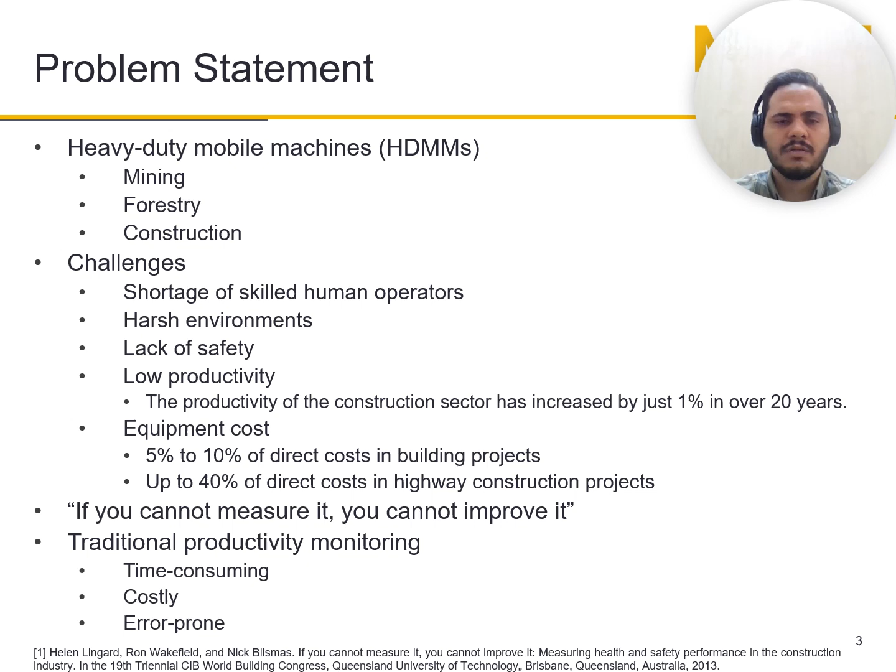The traditional methods for productivity monitoring are based on human and manual observation. They are time consuming, costly, and error prone. We need an automatic method for productivity monitoring.

It can help us reduce the operation time, fuel consumption, and cost. It can also help us optimize planning and working parameters to efficiently manage ongoing projects, as well as accurately cost and budget future projects. Also, it can help us identify potential project issues and improve management and economic situations.

Our application in this paper is the hydraulic excavator. This machine consists of three main parts: traveling body, swing body, and front digging manipulator. Two important tasks for the excavator are the digging and trenching operations.

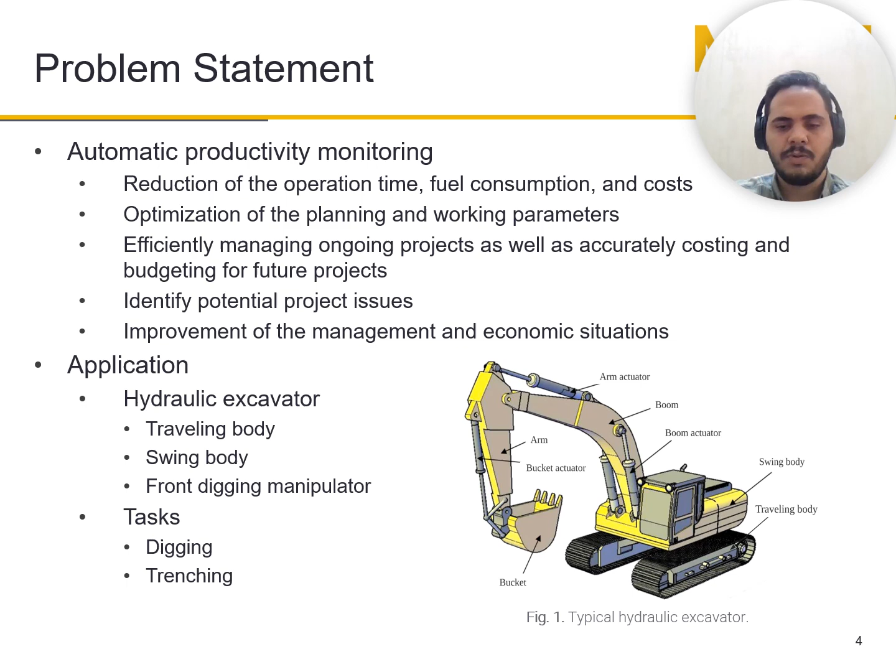Firstly, we should define the productivity. In the productivity of an excavator in digging and trenching operation, there are two important parameters: the quantity of material and the operation cycle time. The operation cycle time consists of the time for filling the bucket, swinging loaded, dumping material, and swinging empty.

The productivity definition for digging is the amount of material, the volume of material per time, and for the trenching operation it is the length of the trench per time.

There are different conditions that can significantly affect the productivity of an excavator in digging and trenching operations: size of the excavator, bucket capacity, repair and maintenance or condition of the machine, digging depth, and swing angle of the operation.

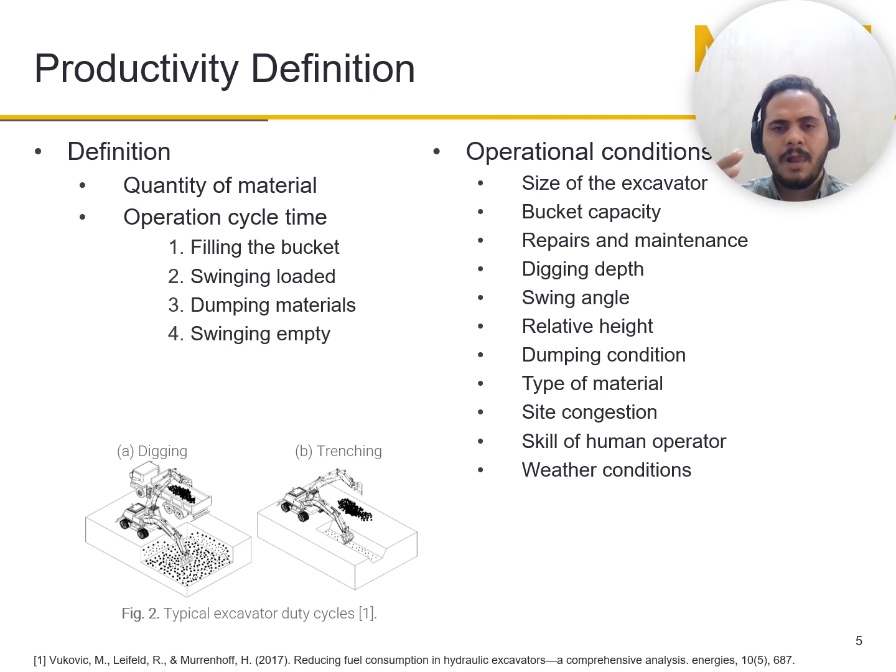Relative height, actually the height between the digging and dumping position. The dumping condition may be, sometimes it's a small truck or sometimes a big pile of material. Also the type of material - when the material gets hard, it takes more time to do the operation. Site congestion, skill of the human operator, and also weather conditions can affect the productivity of the machine.

We need to specify the production performance ratio of the machine. Actually, the closer this index is to one, the higher the machine performance. This index can help worksite managers compare machine productivity with the capability of the machine, ensuring the machine works at full capacity, meets the needs of the project, and provides a high return on investment.

We can calculate this index by using the actual productivity and theoretical productivity of the machine. In this paper, we focus on the theoretical productivity of the machine.

There are some ideas on how to calculate theoretical productivity. For example, from the construction equipment manufacturers' handbooks, we have a model from Caterpillar and Komatsu. But the model from Caterpillar cannot be used automatically because it needs a descriptive model involving a human. So we focus on the BML model from Germany and also the Komatsu model, and we develop them for use in an automatic manner.

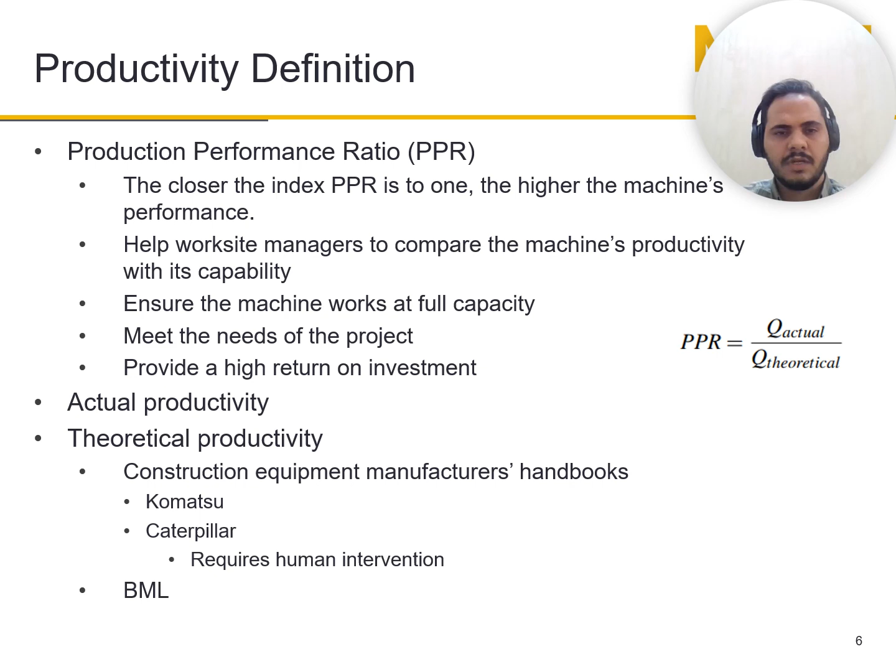Firstly, we need to define the BML model. Here you can see the formula for the BML model.

We have the heap bucket capacity. There are two different standards for the heap capacity: the SAE standard, Society of Automotive Engineers, and the CECE standard, Committee for European Construction Equipment. In the figure, you can see the difference between the two standards. The SAE standard is bigger than the CECE by around 10 to 20%.

Another parameter is the bucket fill factor, which we should specify based on the type of material. Another parameter is the theoretical cycle time. Also, we have two modifying parameters: swing angle factor and digging depth factor.

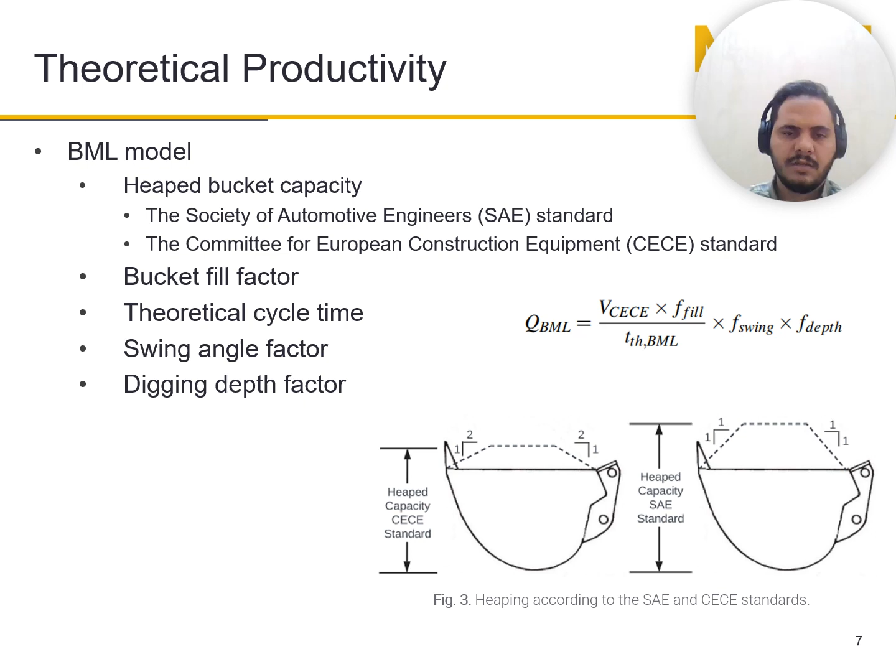Here you can see the formula for the bucket fill factor, theoretical cycle time, swing angle, and digging depth factor.

Firstly, we have a table. We have four different types of excavated material: high, medium, low, and very low. And we have a fill factor for each group of material.

Another step is the theoretical cycle time. We have two formulas: the first one is for high and medium, and the second one is for low and very low types of excavated material.

Also, we have a formula that calculates the swing angle factor based on the swing angle of the operation. And we have two formulas for the digging depth factor: the first one for high and medium, and the second one for low and very low types of material.

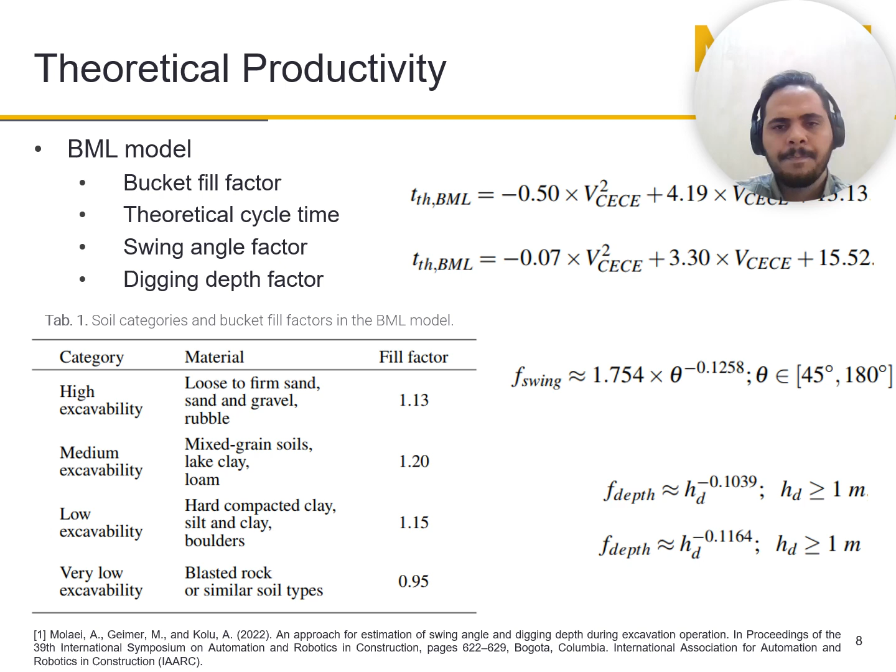Now we have the Komatsu model. In the Komatsu model, we use the heap bucket capacity based on the SAE standard. And for the bucket fill factor, we have a table showing different fill factors for different types of material.

When the material gets harder or bigger, the fill factor makes it smaller. And also we have a theoretical cycle. We should calculate the theoretical cycle and also the conversion factor.

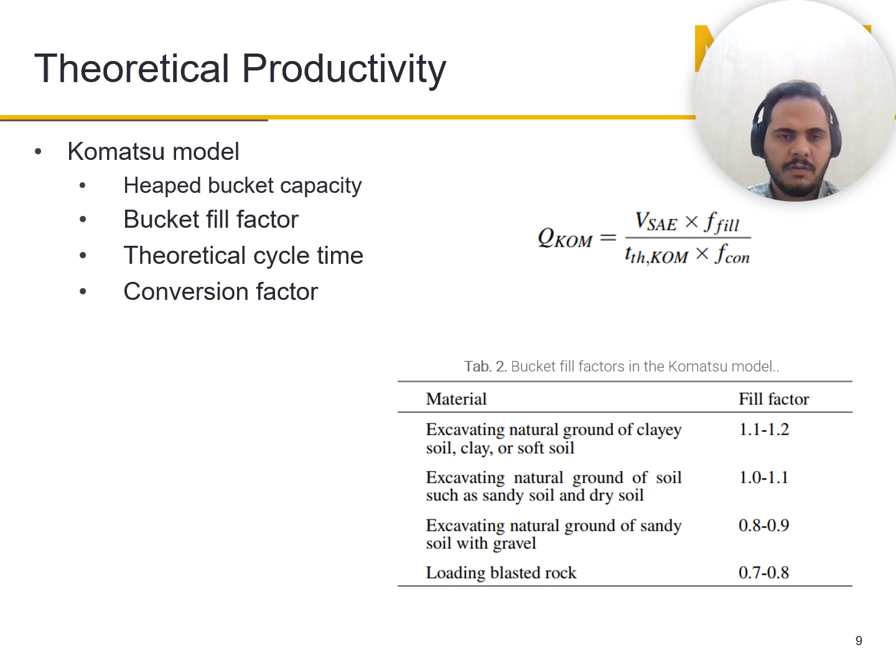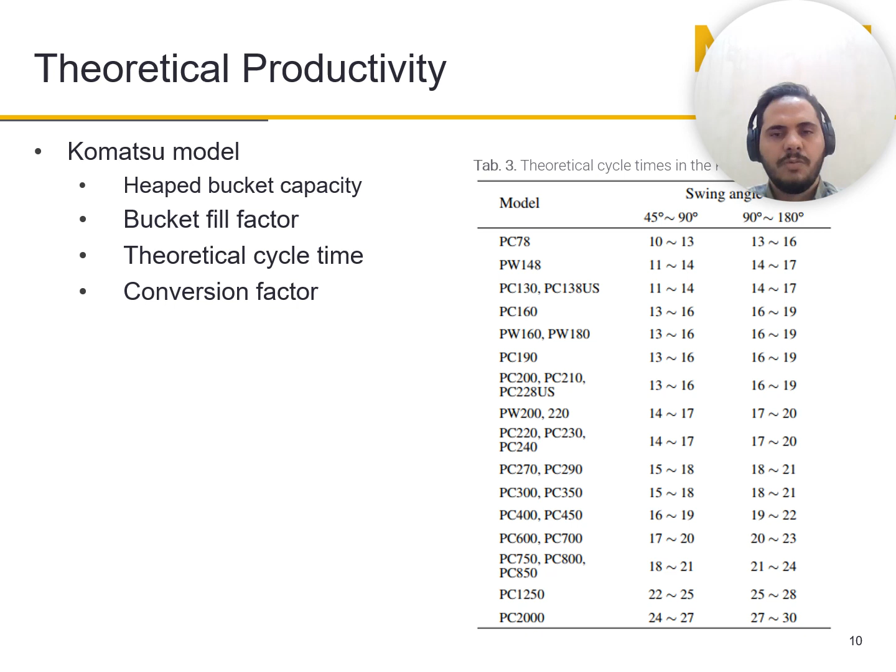In this table, you can calculate the theoretical cycle time based on the swing angle of the operation and also the capability, model, or size of the machine. When the machine is bigger, it takes more time to do the operation, so the theoretical cycle time is bigger.

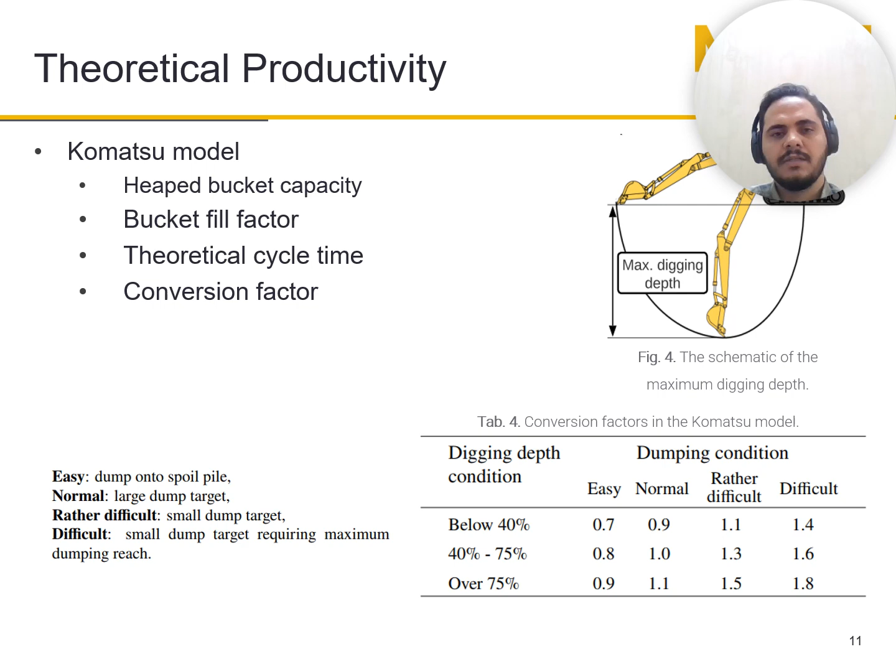For easy, it defines dumping onto a spoil pile. For normal, it is a large dump target. For rather difficult, it is a small dump target. And for difficult, a small dump target requiring maximum dumping reach. This is the definition of the conversion factor in this formula.

Now we extend the theoretical productivity for the trenching operation. The definition of productivity in the trenching operation is the length of the trench per time.

We get some help from the productivity definition for the digging operation. We are using that definition and, after some modification, try to calculate productivity for the trenching operation using two new parameters: the swell factor and the cross-sectional area of the trench.

In the first part, we need to change the definition of the volume of the material. In the digging operation, the definition is based on the loose volume, which is the volume of material piled in the stockpile or in the back of the dump truck in a loose condition.

But in the trenching operation, we should switch to the bank condition, the bank or unexcavated volume, the amount of soil already in the ground. By using the swell factor, as shown in the table for different types of material, we change this volume definition from the loose condition to the bank condition.

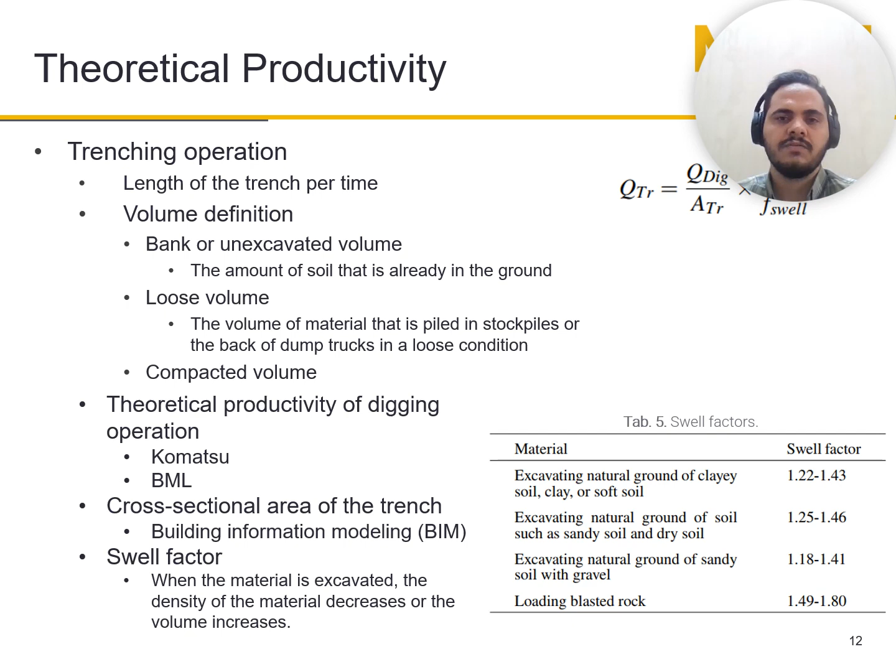By using the Komatsu and BML models, along with the cross-sectional trench area and the swell factor, we extended the definition for the trenching operation.

One important point to consider before analyzing the results is that for automatic calculation of total productivity in digging and trenching operations, we need some inputs: the swing angle of the operation, digging depth, and type of material.

In one of the references of this paper, we presented a method to automatically calculate the swing angle and digging depth of the operation. I mention this point to clarify that the type of material and dumping conditions are assumed as known inputs.

Firstly, we analyze the swing angle and the effect of digging depth on this formula. We perform the swing angle analysis, assuming the pile of material is on the ground surface, so depth is around zero. The swing angle changes from 45 to 180 degrees. As shown in the figure, the absolute difference between the BML and Komatsu models is less than 3.5 seconds, and the Komatsu model seems more sensitive to swing angle variation.

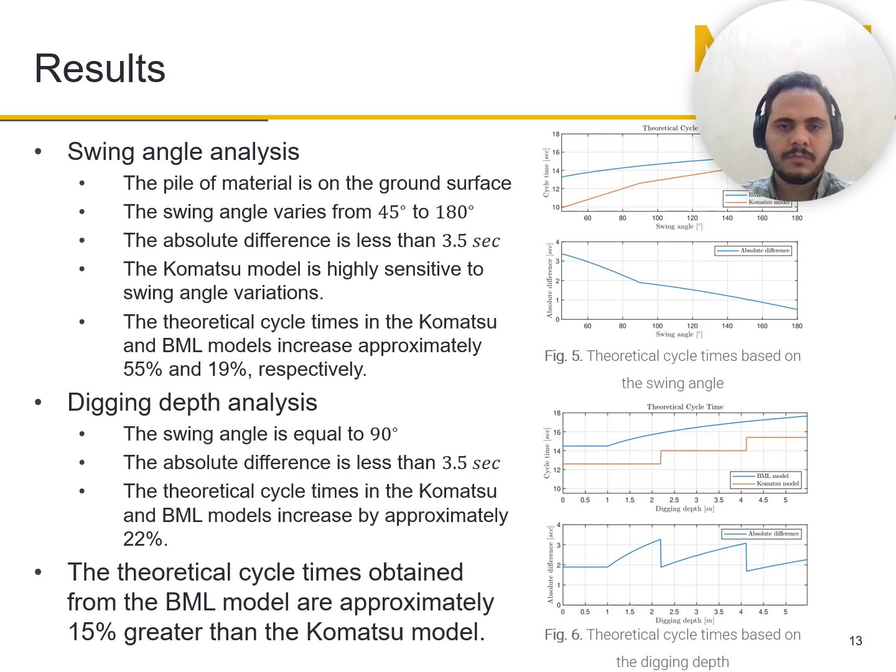Here we did some real measurements of actual operations to analyze what happens in the real world. We used a Komatsu excavator, model PC138US, with a bucket capacity based on the SAE standard of 0.37 cubic meters. The maximum digging depth capability of the machine is around 5.48 meters. The material in the operation was sand and gravel, and the dumping condition was a large dump target.

We did 4 experiments: 2 performed by an experienced operator and 2 by an inexperienced operator. We also applied the methods for automatic swing angle and depth estimation.

Here you can see the result of the swing angle estimation. In 2 experiments, the swing angle is around 120 degrees, and in the other 2 experiments it is around 60 degrees.

The result of the digging depth estimation has not been shown because the pile of material is on the ground, so the digging depth is zero.

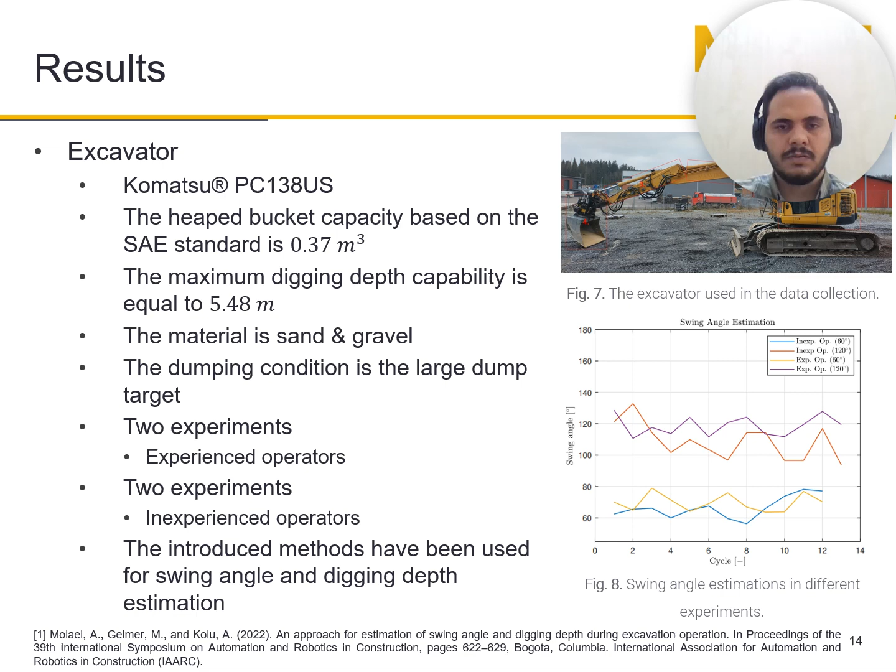Here you can see the experiment. In the first and second operations, done by the experienced operator, the swing angle is around 60 and 120 degrees. The third and fourth operations were done by the inexperienced operator, with swing angle approximately 60 and 120 degrees.

As you can see, the real cycle time by the inexperienced operator is more than the experienced operator, and the theoretical cycle time estimated by the Komatsu model is lower than the BML model.

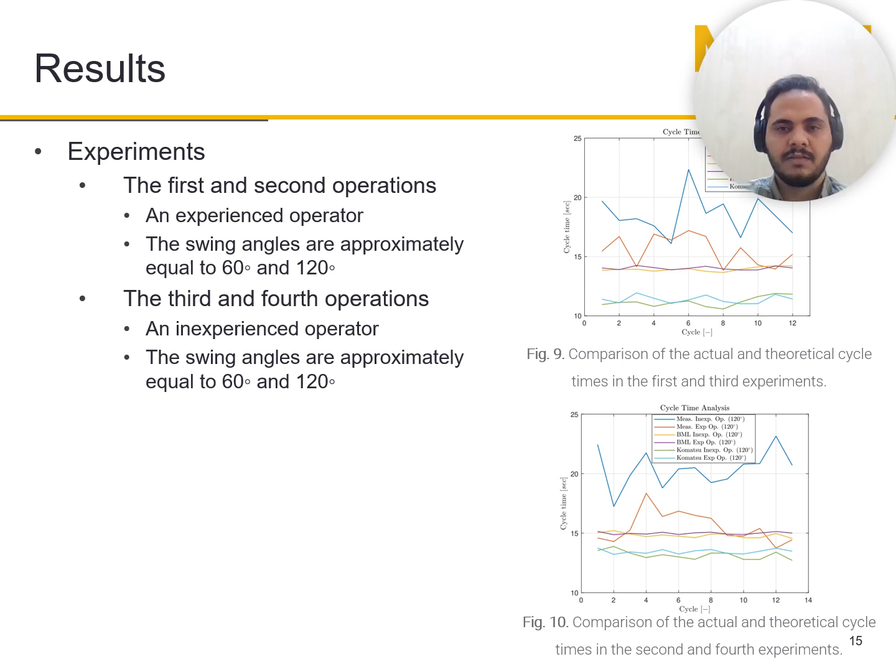As shown in figure number 10, in 1 or 2 cycles the experienced operator is working even a little better than the theoretical prediction, better than expected.

In this paper, two automatic methods for theoretical productivity estimation for excavators in digging and trenching operations have been proposed: one is called the BML model and the other the Komatsu model. We also extended the method for use in trenching operations.

Firstly, the effect of swing angle and digging depth on the Komatsu and BML models was analyzed. It was found that the BML model is more conservative and gives a more realistic theoretical cycle time compared to the Komatsu model, while the Komatsu model is more optimistic and shows greater sensitivity to parameters such as swing angle.

In the future, we need to model a filling factor in the trenching operation, because the operator spends some time filling the trench, and this parameter should be considered. Also, in this operation, the dumping condition and type of material have been assumed as known, but in the future we need automatic methods for material identification and dumping condition identification.